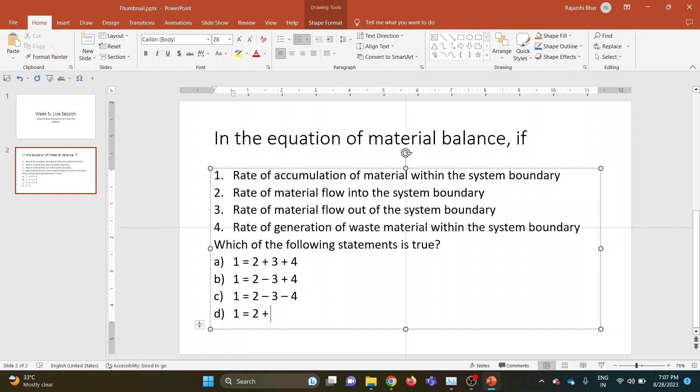Okay, so these are your options. You can think about it and please share your answer in the chat box, or you can unmute yourself.

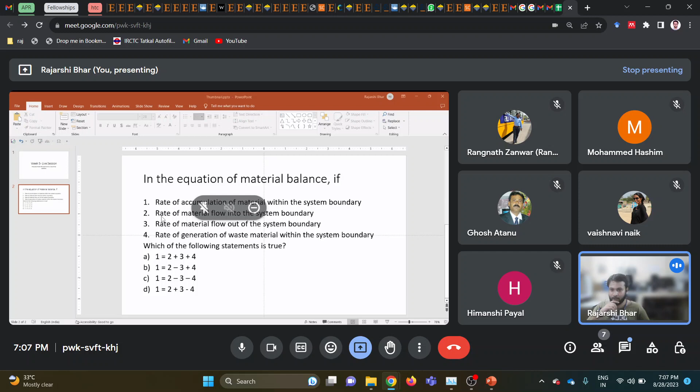Okay, option B is the correct answer. The rate of accumulation is equal to point number 2, the rate of material flowing into the system, minus the material going out of the system, which is obvious, plus point 4 — any material generated inside the system will be an addition. So option B is correct.

Some examples where this concept applies: landfills, where you track the amount of waste material coming in and generating in the landfill, giving the total amount of waste accumulating. Or consider a lake, where some contaminant, like nutrients, is coming into the lake, or generating by itself due to various chemical reactions. So mass flow of such contaminants can also be tracked through this material balance concept.

Now moving on to the next question, an easy numerical one. You have to find the resulting number of moles of water that will be formed when 10 moles of oxygen reacts with 10 moles of hydrogen. Please calculate this, and I will share the options in 2-3 minutes.

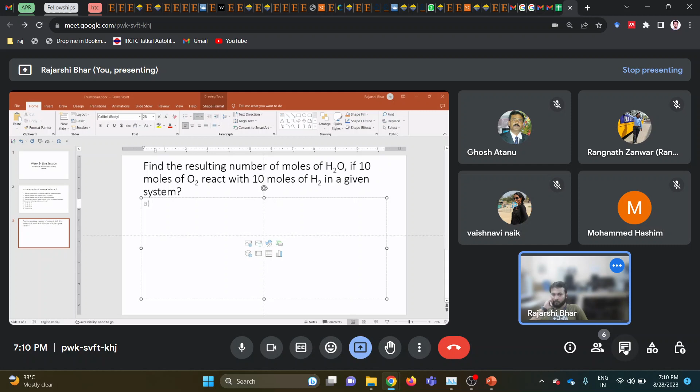Okay, 10 moles is the correct answer, as most of you have already guessed right. To solve such questions, first we write the chemical equation by balancing the number of moles on both sides: hydrogen reacts with oxygen to form H2O, which balances to 2 moles of hydrogen reacting with 1 mole of oxygen to form 2 moles of water. So the number of moles of water formed equals the number of moles of hydrogen that interacts in the equation. Since we have 10 moles of hydrogen, the number of moles of water formed will also be 10 moles. So those who got the answer as 10, it is correct.

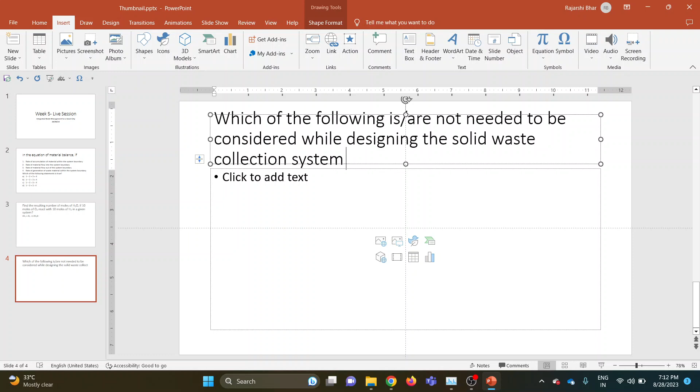Moving on to the next question, a theoretical type, very easy. Which of the following options are not needed to be considered while designing the solid waste collection system of a community? You have to select the option which is not needed.

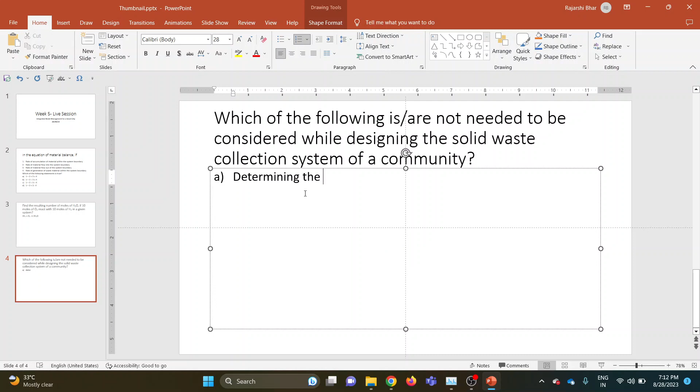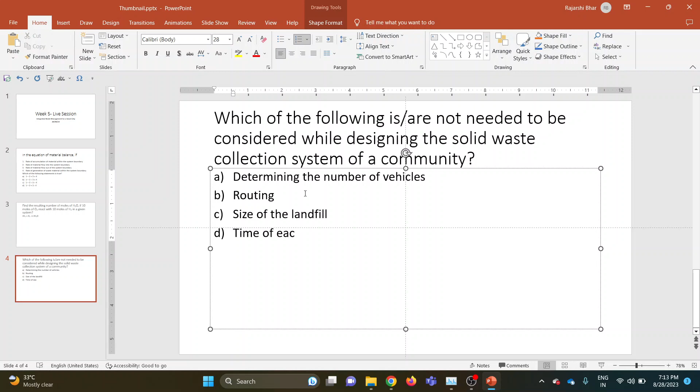Very easy question: which of the following are not required for designing the collection system of waste in a community? Option C has been highlighted, and it is also the correct answer for this question.

So moving to the next one. This is about backyard composting, and which of the following options are necessary or required to be considered while going for this backyard composting.

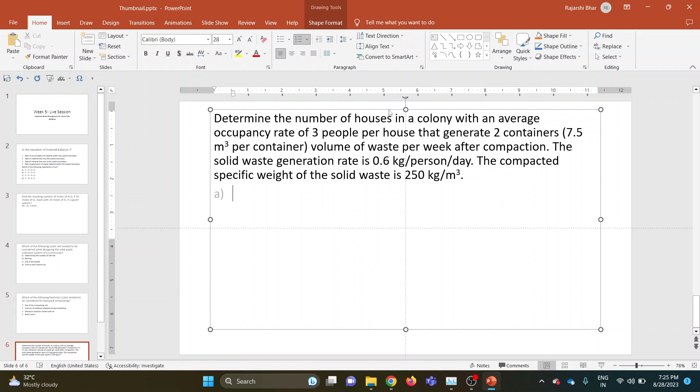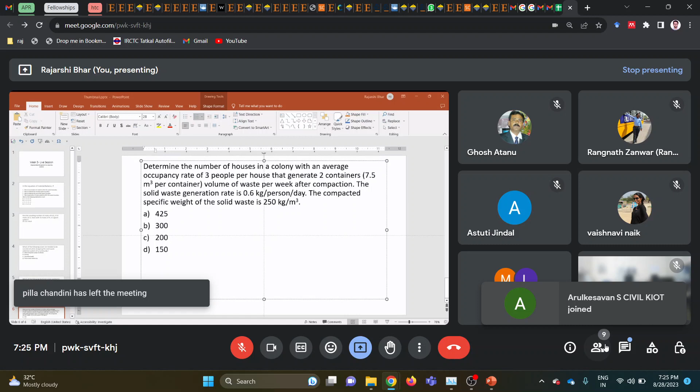One person suggested 150. Okay.

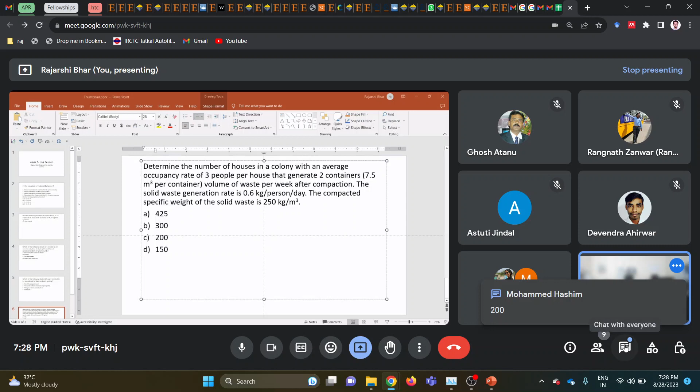Okay, so we have got another option, 200. Now we will start solving the question and see what it actually is.

Occupancy rate is 3 people per house, and each house generates 2 containers, 7.5 meter cube per container, and the compacted specific weight is given here. So based on this data, let's see what we get.

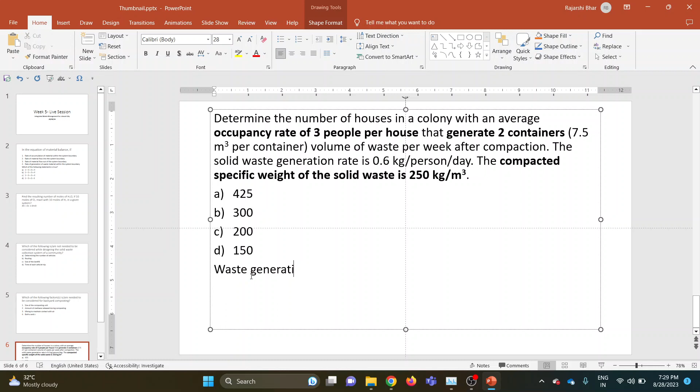So, waste generation per week.

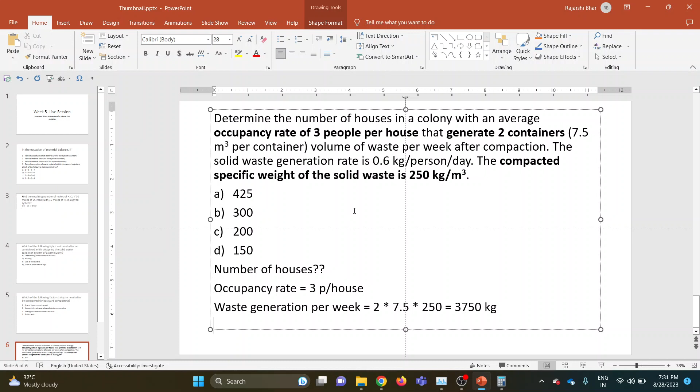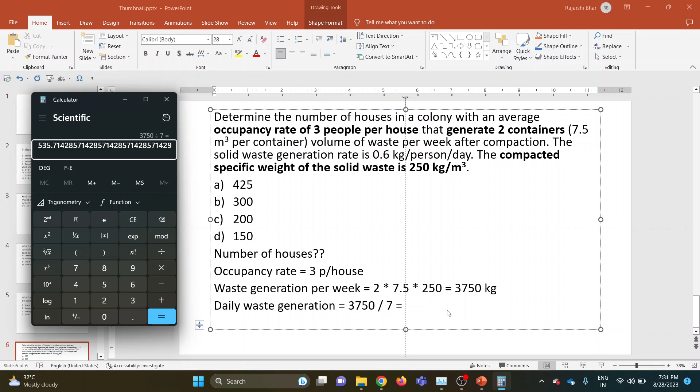So this is the weekly waste generation. So the daily waste generation will be - this is the daily waste generation.

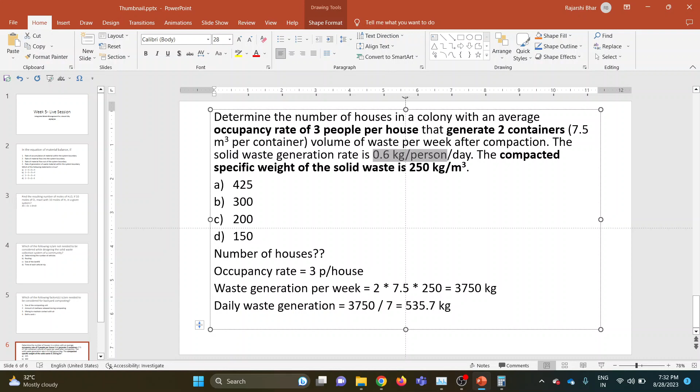So the per capita or per person waste generation per day is also given, which is this - so this is per capita waste generation per day, and this is the total amount of waste generation.

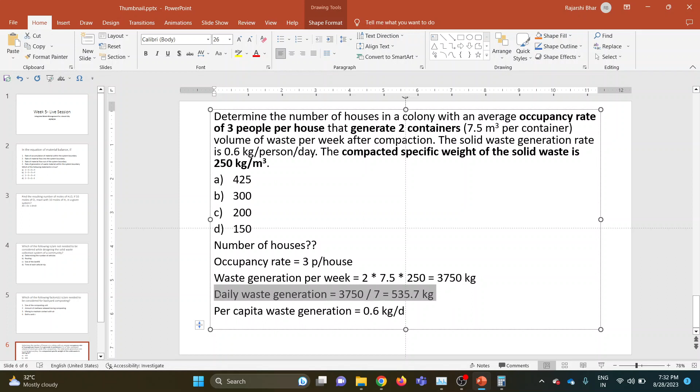To determine the number of people, the number of persons is equal to 535.7 divided by 0.6, which will be about 893. And so the number of households will be - since you have been asked to determine the number of houses.

That will be, since there can be three people in one house, so we have to divide it by 3.

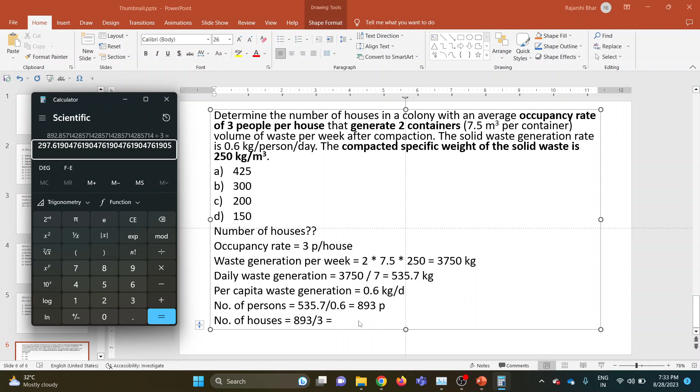It is coming around 298, so the closest option is 300. So 300 should be the correct answer.

If you have any doubt on this, please feel free to unmute yourselves and share that. I will again just repeat the question.

So you have to determine the number of houses in a colony. That is the question. Occupancy rate has been provided to you, that 3 people are there per house, and there is a waste generation of 2 containers. So based on that waste generation per week, this waste generation is the total amount of waste that generates.

Then based on that, 2 containers of waste are generated with the volume of each container being 7.5 meter cube, multiplied by 250. 250 why? Because the waste has been compacted and the compacted density has been shared with you, 250. This is the total amount of waste generated per week. Then you can calculate the daily waste generation, followed by per capita waste generation has been provided to you. Then you can divide it and get the number of persons who are generating this amount of waste, and finally the number of houses.

I think this can be a confusing part in this question, that some of you must have thought that occupancy rate of the house is 3 people per house that generate 2 containers. Most of you may have taken this as that 2 containers are being filled by each household, but that is not correct, because 2 containers is being filled by the entire community. So that is how we should go ahead, because the compacted volume is 7.5 meter cube, and it is very unlikely that just a single household can fill this 7.5 meter cube of compacted bin in each week.

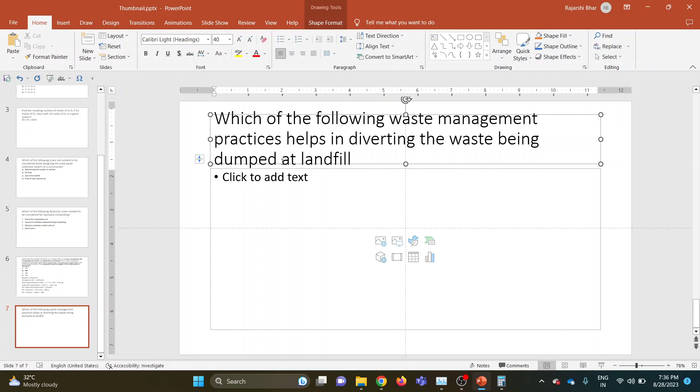Very easy question. You have to find which of the following waste management practices helps in diverting the waste that is being dumped in a landfill.

Okay, so these are your options.

Yes, option 4 is the correct answer because by going for all these above three approaches, you can divert the waste from the landfills.

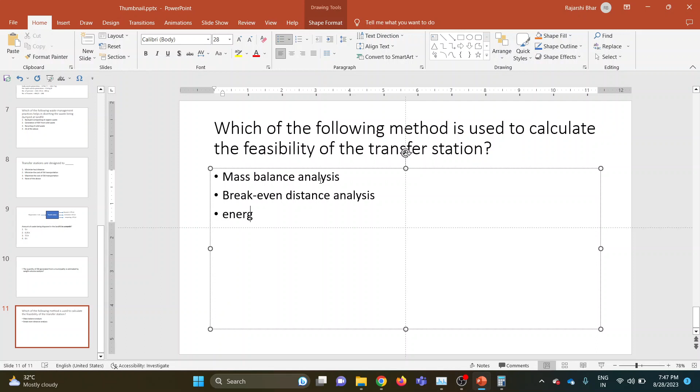Which of the following methods... so you have to choose an option which is used to calculate the feasibility of a transfer station. Your options are mass balance analysis, break even analysis, break even distance analysis. So which one do you think?

Yeah, any more options? Yes, option 2 is the correct answer. So we choose the location of the transfer station based on break even distance analysis. Similarly, moving on to the next question, again a very simple one, which asks you about the components of solid waste which are not compostable. Option 4, absolutely correct, metals. Very easy questions these are.

Now the next question is a numerical based one. Okay, so you have to determine the number of 7.5 meter cube containers which are required per week for collecting waste after compaction. The number of houses in a colony is 200, with 3 people in each house, and the waste generation rate has also been provided along with the compacted density or the specific weight that is to be filled in the 7.5 meter cube containers. So please calculate it and share your answers.

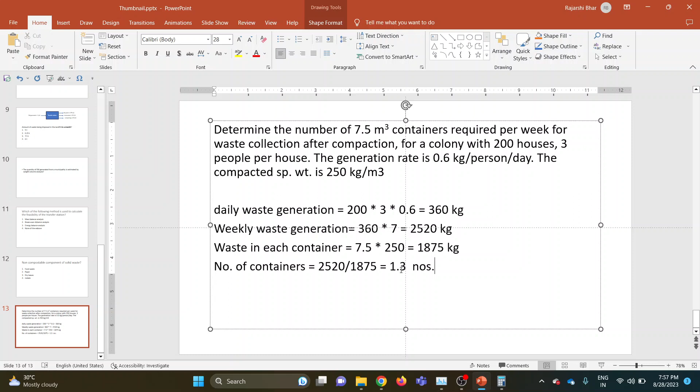Sorry, this is not it. Although this is coming as around 1.3, since that is not possible, you require two containers. So this is the solution.

Then moving on to question number 13, and from now onwards, all the questions will have multiple correct answers, so you have to choose accordingly. The first one, question 13, is very easy. Which of the following vehicles are used as transfer vehicles for solid waste? Okay. So any thoughts? It has got more than one correct answer.

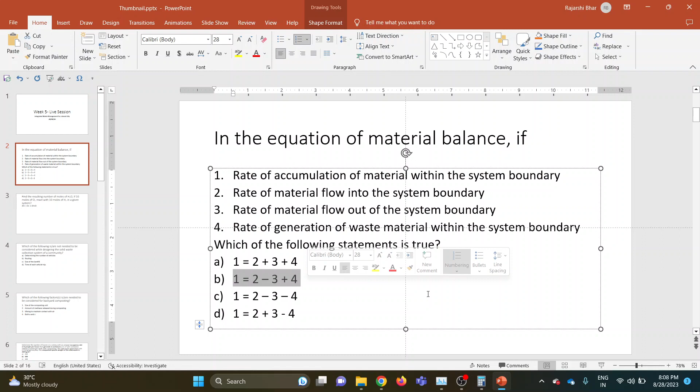We have to build a relationship among the four of them. The correct answer was option B, because statement 1 is the rate of accumulation of material within a system. Statement 2 is the rate of material flowing into the system. From whatever material flows in, I subtract the material going out, which is statement 3. Finally, adding waste material generated in the system due to reactions or other processes. So option B is correct: accumulation equals inflow minus outflow plus generation.

Then the next question was to find the number of moles of water formed when 10 moles of oxygen react with 10 moles of hydrogen. The answer lies in this chemical equation, wherein 2 moles of hydrogen react with 1 mole of oxygen to form 2 moles of water. So the moles of water formed equal the moles of hydrogen reacting, and the moles of oxygen are half the hydrogen requirement. Since 10 moles of hydrogen take part in the reaction, the water formed is also 10 moles.

But I can modify this question slightly. Let's say we have 20 moles of oxygen and 8 moles of hydrogen. So how many moles of water will be formed then? This is a question to everyone. I will wait, let's say, 1-2 minutes for you to answer.

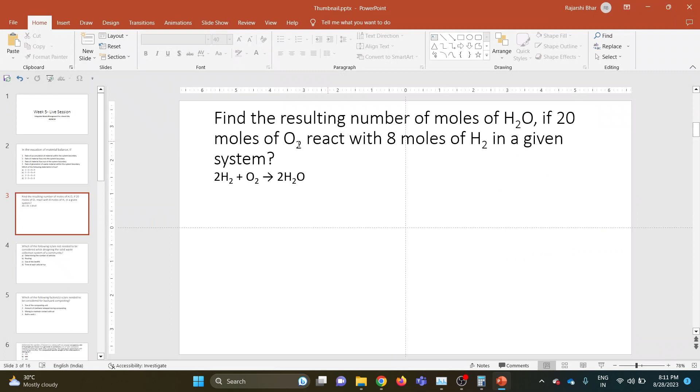Yeah, so I can see that the basic concept of this question has been understood by everyone. 8 is the correct answer, in a way similar to what was before. 8 moles of hydrogen is required and the number of moles of oxygen required is half of that, which is already sufficient. 20 moles are there, out of which 4 moles will be used to form again 8 moles of water. So this part is sorted.

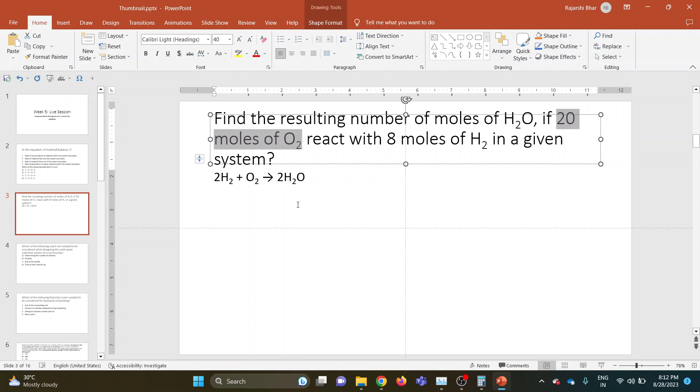So moving on to the next question, it was stated: which of the following is or are not needed to be considered while designing the solid waste collection system of a community? Among all these options, which were determining the number of vehicles, routing, size of landfill, and time of each vehicle trip, the correct answer was size of the landfill. It is not the concern when we are trying to focus on the collection system of the solid waste.

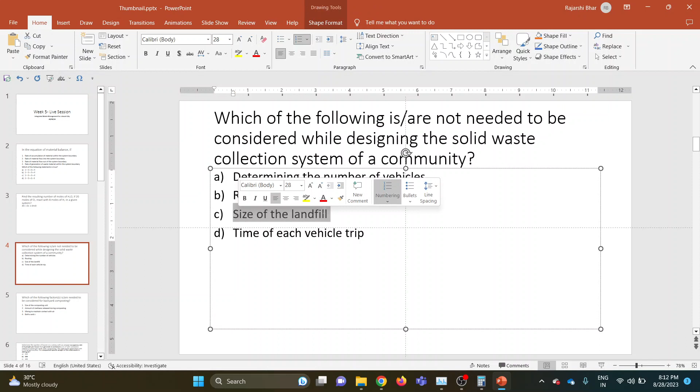So in those instances, we take into account the routing optimization, time taken for each vehicle to collect waste from individual households and then move across different routes, and also determining the optimum number of vehicles which are required. So option C was the correct answer, which is not considered while designing the solid waste collection system.

Then in the next question, the options were given and you had to choose the ones which are considered for backyard composting. Among these, size of the composting unit, yes, it is very important while going for backyard composting. Then mixing to maintain contact with air, that is of primary importance for any composting process. That is why option 4, which is both A and C, is the correct answer.

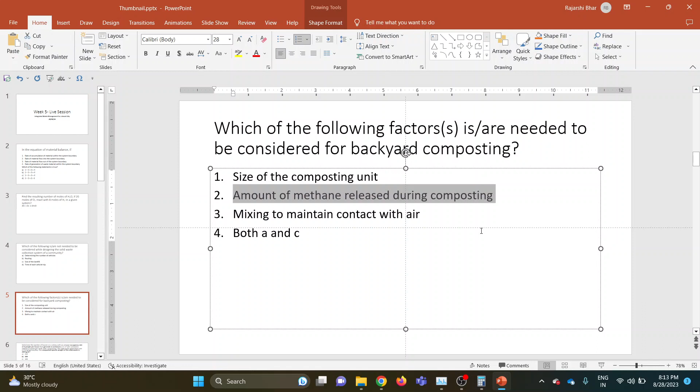Option B, that is methane released during composting, is not the correct one, because composting is basically an aerobic process, and you can say that a negligible amount of methane should be released while composting, because methane is basically an anaerobic reaction product, not a product of any aerobic process.

The next was a numerical based question wherein you had to determine the number of houses in a colony, and you have been provided with some information: the occupancy rate is 3 people per house. Then the total waste that is generated is compacted and filled in 2 containers each week. After that, you have been provided the waste generation rate and the specific weight of the solid waste after being compacted. So based on this, you had to calculate the number of households.

So the occupancy rate is 3 people per house. Waste generation per week is 2 times, because you have been told that 2 containers are being filled every week. So first, 2 containers are there. Then volume of each container is 7.5, and the compacted density of the waste in those containers is 250. Multiplying these three components, number of containers into volume into density, we will get the total mass of waste generated per week. So now, daily waste generation is that divided by 7.

Per capita waste generation has already been given as 0.6 kg per day. So dividing the daily waste generation by per capita waste generation, you will get the number of people who are producing the waste, and then dividing the number of people by 3, because there are 3 persons per house, you will get the number of houses, which is almost 298. The closest option here is 300. So option B was the correct answer.

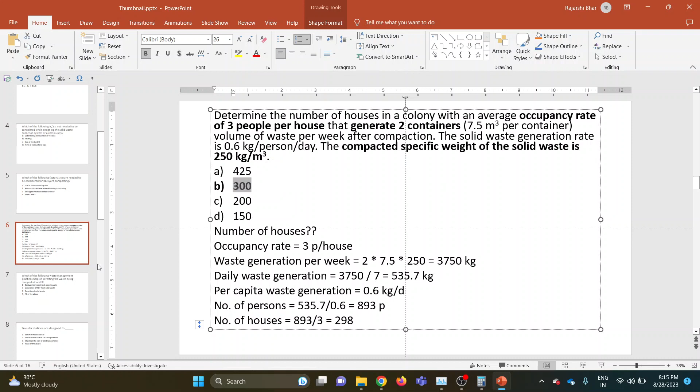Then in the next question, you have been asked which of the following waste management practices helps in diverting the waste being dumped at the landfill. The first option is backyard composting of organic waste. It is one of the correct answers, because if you do backyard composting, most of the organic fraction that is generated in households can be handled and treated in that same place of waste generation.

Then second was the generation of RDF, refuse derived fuel, from solid waste. So if I have a mass of solid waste, it can be dried and compacted, and then those compacted small capsules or bricks or pellets are used as a fuel for different purposes, like in cement kilns, brick kilns and all that, instead of coal and those materials.

Third is recycling of solid waste. Recycling of solid waste like plastic, metal, paper can also divert the waste from landfill. So that is why all the 4 options were correct.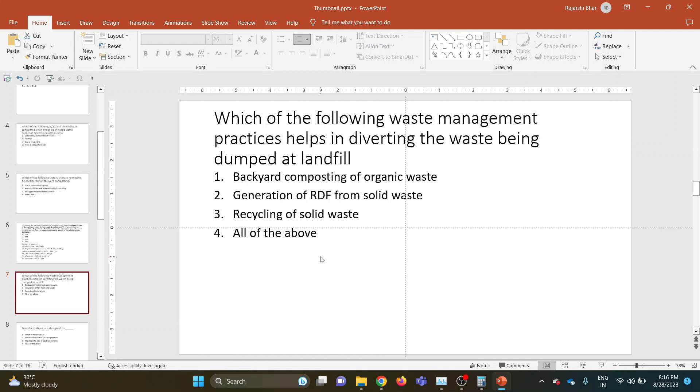Why? The reason is, when the waste is collected from our households, we usually see that our collection vehicles are much smaller in size. So in case there is no transfer station, those many smaller vehicles have to directly go to the landfill.

It has been observed that fuel consumption from smaller vehicles is significantly higher. That is why when a transfer station is introduced at an intermediary point, smaller vehicles first take their waste there and dump it. From there, bigger trucks carry the compacted waste to the landfill. Using bigger vehicles makes waste collection cheaper because fuel consumption reduces significantly. That is one reason transfer stations are designed to minimize overall cost. Also, waste can be compacted at the transfer station, which is usually done, allowing more waste to be loaded into a single truck. That is another benefit of transfer stations.

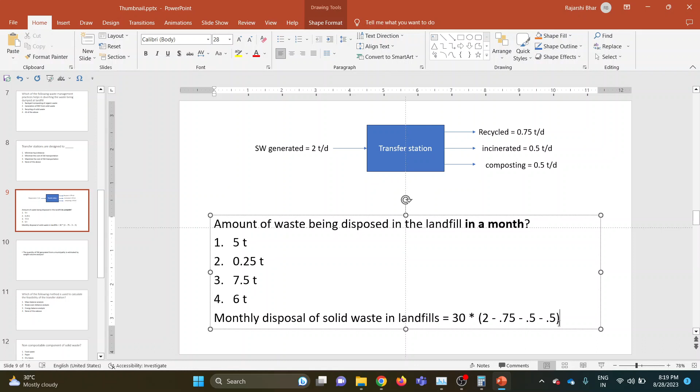The data given is for daily waste generation and transfer. To convert into monthly figures, we multiply by 30 or 31. We'll see what comes with 30 first. Total waste is 2 tons per day minus all other components: 0.75 goes for recycling, 0.5 goes for incineration, and 0.5 for composting. So the daily landfill amount is 2 minus 1.75, which equals 0.25 tons per day. Multiplying by 30 gives 7.5 tons, the monthly amount of waste disposed at landfills.

The next question asks which method is used to calculate the feasibility of a transfer station, among mass balance, break even distance, energy balance, or none of the above. The break even distance analysis is the correct answer, because a transfer station should be located at a certain intermediary point between the colonies, household areas, or residential complexes from where waste is collected, and the landfill, which is located at some considerable distance from those collection areas. So somewhere in between lies the transfer station.

Smaller vehicles carry the waste to the transfer station, and from there it goes to the landfill. So the location of the transfer station is determined based on the break even distance analysis, which gives us a point with the optimized distance from both the landfill and the residential areas. That distance is also associated with minimum cost.

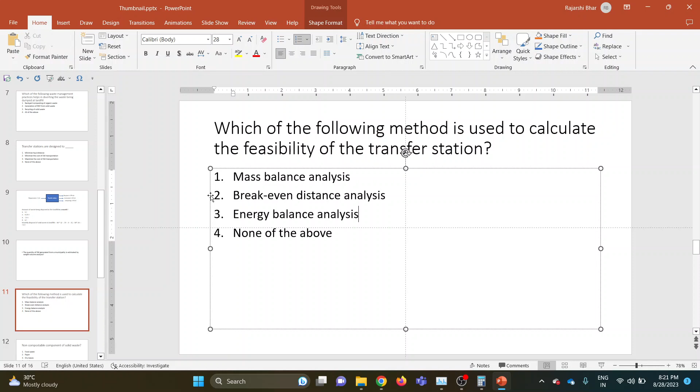First, we start with daily waste generation, which is the number of houses multiplied by people per house, giving the total number of people, which is 600. Multiplying 600 by the daily waste generation per capita of 0.6 kg gives the waste generated daily. For weekly generation, we just multiply by 7.

We know that 7.5 meter cube is the volume of each container, and the compacted density of waste is 250 kg per meter cube. So the mass of waste that can be filled in each container is volume into density, that is 1875 kg. The amount of waste to be collected each week is 2520 kg. Dividing the two gives around 1.3 containers. But 1.3 containers doesn't make sense, so you need more than one container to take care of the extra 0.3 fraction. That is why two containers are needed.

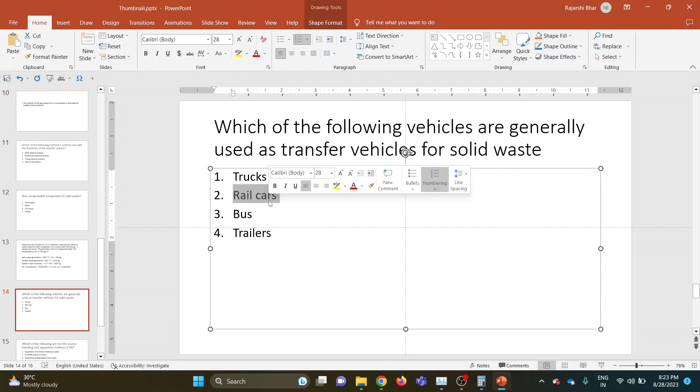The next question is, which of the following vehicles are generally used as transfer vehicles of solid waste? The correct answer is trucks. We know trucks are used, and trailers are used. The other comparatively less known component is rail cars. Rail cars are those cargo kind of bogies in trains which are open from the top. The waste is dumped in those containers, and then, similar to a train engine, one carries the waste to the desired location.

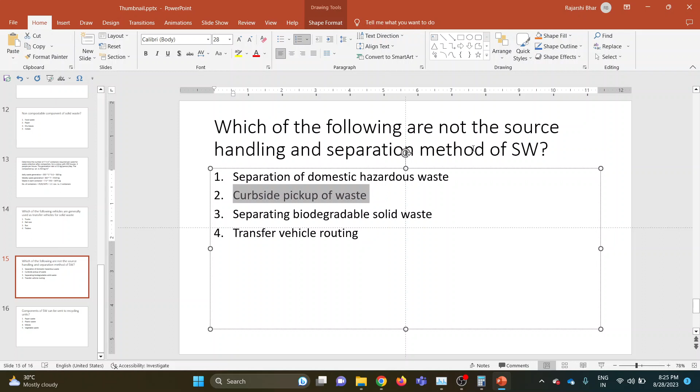The second last question was, which of the following are not source handling and separation methods of solid waste? Option A, separation of domestic hazardous waste, is a component of source segregation. Curbside pickup is not actually source segregation, because if you dump mixed waste in bins at the curbside without segregating it, it becomes difficult to separate, and the collection vehicle will directly pick up the mixed waste only. The third option, separating biodegradable solid waste, which we sometimes do at households for composting or using as nutrient material for plants, is again source segregation. Finally, transfer vehicle routing is a different concept altogether. So options 2 and 4 are not components of source handling and separation of solid waste.

Moving to the final question, which is very simple: out of these four, which components of solid waste can be recycled? Paper can be recycled. Most plastics can be recycled, except single-use ones, because collection itself is a challenge and they're often contaminated. Thin film plastics present in wrappers of bottles or other packaging are also very difficult to recycle. But as a whole, plastic waste can be recycled comparatively much easier. Paper waste, plastic waste, and metals — these three components are considered recyclables in the solid waste stream.

So these were the 15 questions that we discussed today. In case you have any doubt, you are always free to unmute yourselves and share that with us, or you can also use the chat box to type your doubt or query.

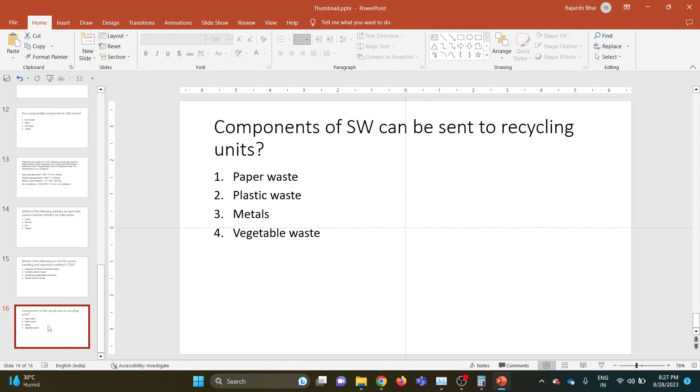I have a question about that assignment. The question was which of the following statements was incorrect. The options were: first, solid waste generation rate is equal to solid waste collection rate. Second, backyard composting negatively contributes to solid waste collection rate. Third, informal selling of solid waste to kabadiwala positively contributes to solid waste coming to the ULB, urban local body, facilities. And fourth, all of the above. You have been asked which of these is incorrect.

What I answered was A: solid waste generation rate is equal to solid waste collection rate, which is an incorrect statement. And for the second option, backyard composting negatively contributes to solid waste collection rate - this is also incorrect.